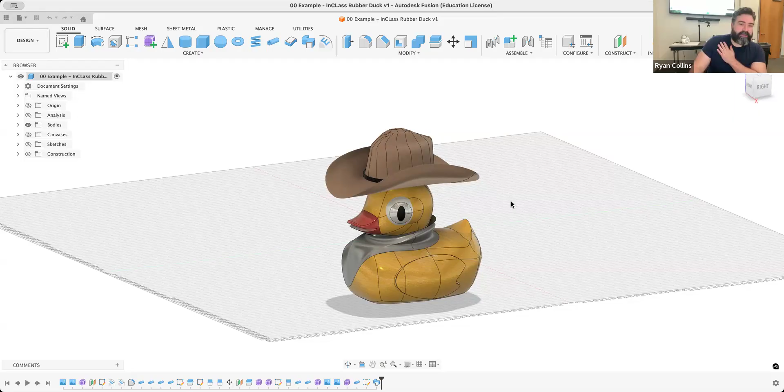But I wanted to show you how you can approach some things that are much more free form, like a hat, a handkerchief, or possibly a couple of people also asked me about a cape. And I wanted to show a couple of different ways you could approach this.

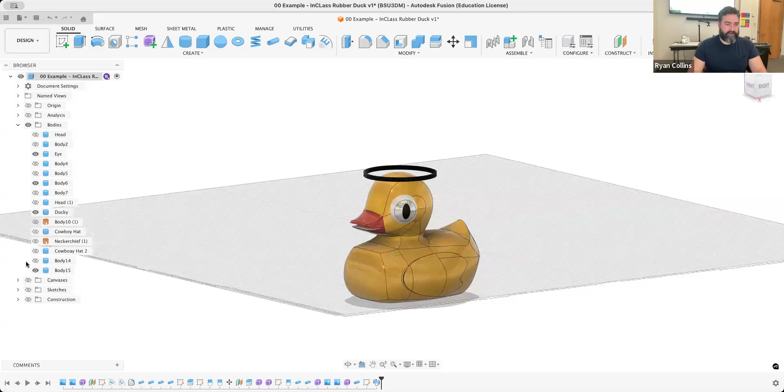So I'm going to stay with the duck here just because it's there. Let me instead hide my little neckerchief and cowboy hat to give you— oh, that's right, I never did join the little band on that. So inevitably I'll start a new component with this, but we'll go from there.

So one of the main things to remember is your accessories do not have to be part of the body, meaning you don't have to combine. Frankly, that would kind of defeat the purpose of it being an accessory, a separate body. If you try to join it, there you go.

Some people are approaching things like they want to put sunglasses on or something like that. Perfectly fine, that would probably even be better done with a sketch extrude situation rather than going through the form workspace. But with things that are much more flowing, obviously you probably need something that is more flowing.

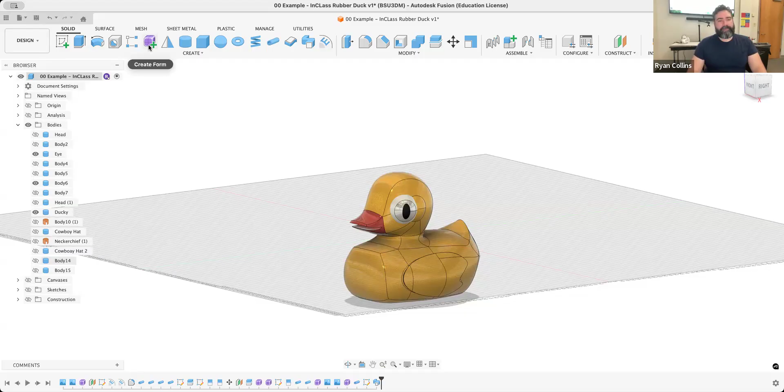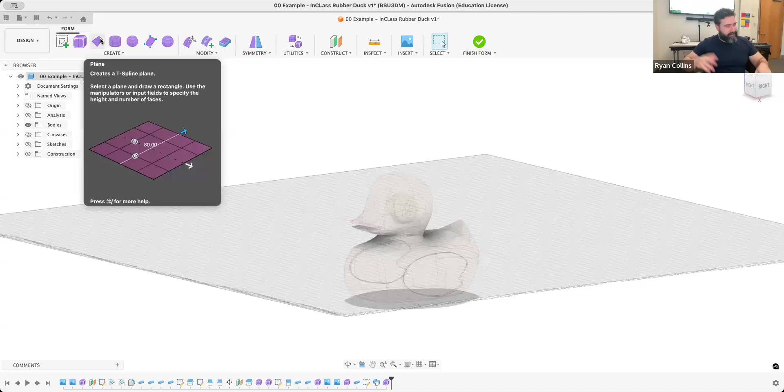So to start with this, I'm going to go to create form, and I want to show first a way to make something that is already going to be an undulating surface, like a cape or towel or something like that. One approach would be to start with a plane and then make it complex enough and move the vertices up, down, around. But if you know that you want something to have a certain profile, well, do exactly that.

So what I'm going to do is—like we've done in multiple other ones—you can create extrudes, sweeps, or revolves, and also lofts into the fusion or into the form workspace. So why not start with that?

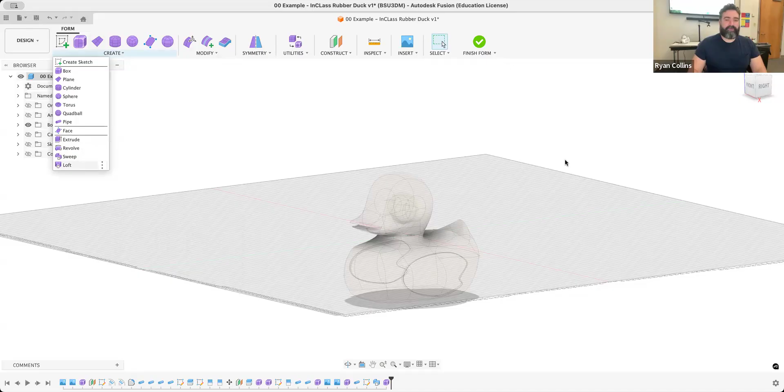So I'm going to start with a construction plane and two sketches. Let me move a couple of construction planes out. Sure, 50, why not. Oh, it's hiding all my construction planes. And let me start another one. Right click, repeat, just because I know I'm going to make something much longer.

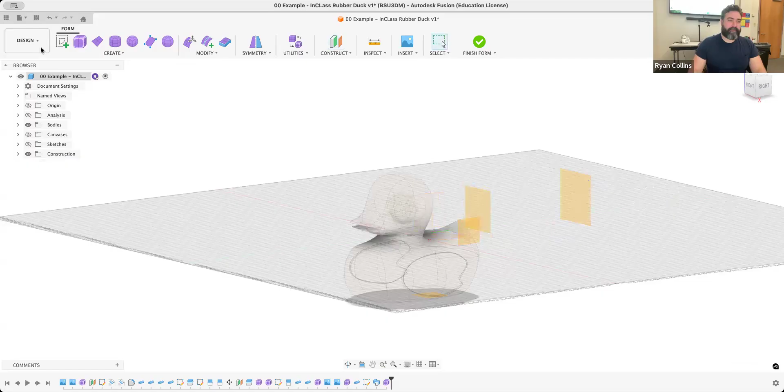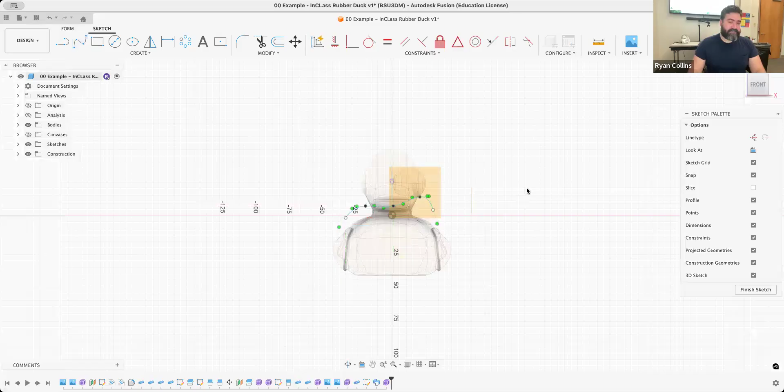Okay, doesn't really matter, so I'm still in the form workspace. You could have drawn these outside of the form workspace, it does not matter. But to start, I'm going to work on the intermediate space, and I'm just going to draw a bit of a fit point spline. So I just want something that's kind of flowy, curvy, starting from there.

The good thing is, as I'm going to build this as a loft, you can always make alterations after the fact. So I'm going to start one sketch—of course, it's hiding my sketches—repeat, I mean repeat the sketch.

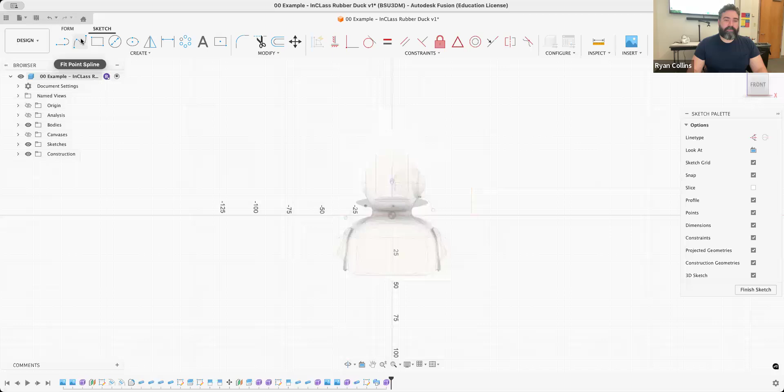Start a new one back there, and let's make this much larger. Super duck it will be. Oops, looks like I accidentally ended my fit point spline there. Did not mean to do that.

Extra flowy, extra big, all that kind of thing. Doesn't even have to end on the same up-down sweep, just gigantic. All right, so I have one sketch profile and another.

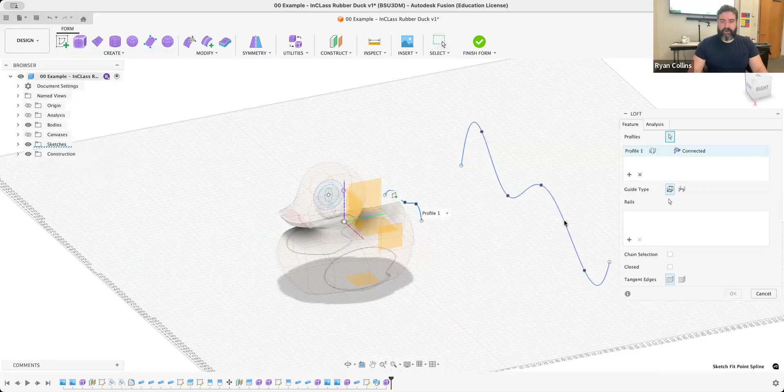Cool, I can go to create, loft, first sketch profile, second one, and it's going to automatically create as a plane now. Rather than before, it would have had to be a completely closed profile, meaning an inside and outside surface.

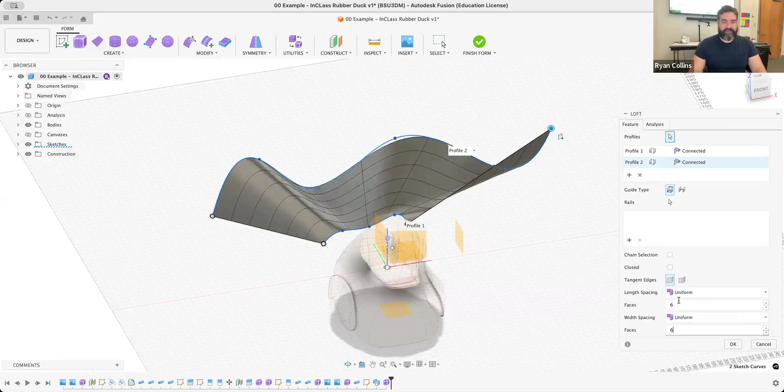This time, now I can create this as a flowing, undulating plane surface, complete with all its own edges, vertices, and whatnot. Now again, you can, of course, still control the number of faces, both length and width. So if you want to simplify this a little bit, do so—but do watch as I simplify the amount.

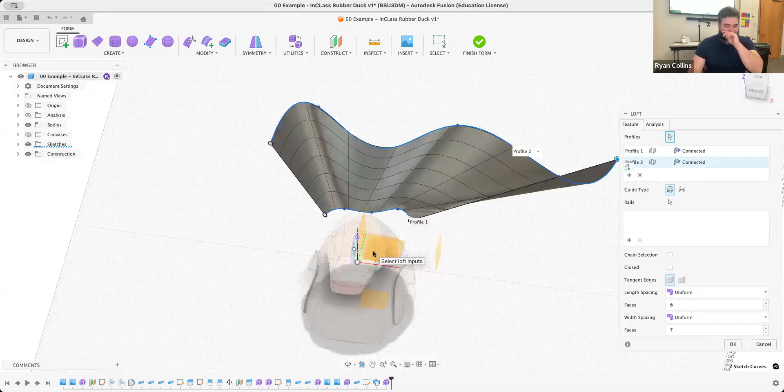If I go too far, it simply does not have enough complexity to follow my profile. That's up to you, you can bump it back up, just see where it gets to get it close enough. So if you want to keep it simple for now, you can leave it more simple and add complexity later. Okay, cool, that'll work for me for now.

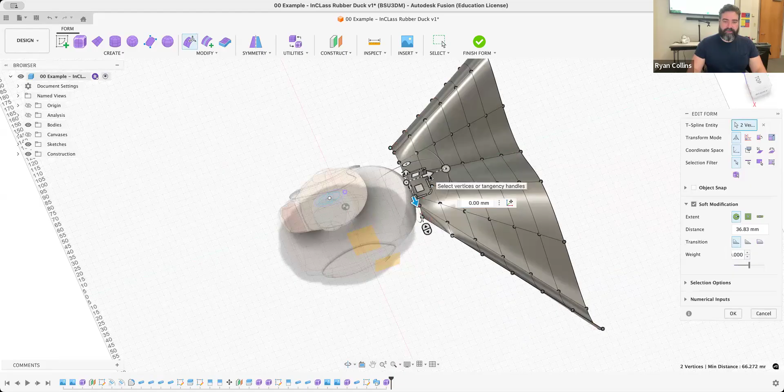From here, now I can go back and play with the edit form just like we've been doing. Let's go by vertex. I want to add the little corners to tie in, so I'm going to select both of those vertices. If I want, I can switch soft modification back on, have a little more control with it, drag those both forward, and now very quickly start to manipulate and become a cape.

So you can see, obviously, I can get really close to what I want to have very quickly. Now one thing about this—oh, should not have done it that way, I think I missed one. Yep, thank you, yep, there it is. There we go. So you don't have to make it right up against right from the get-go.

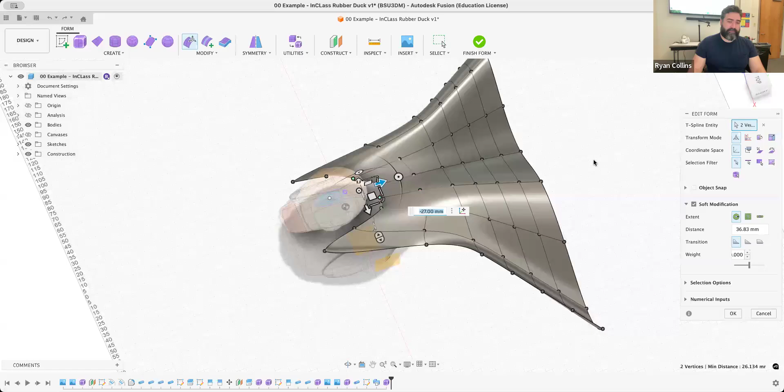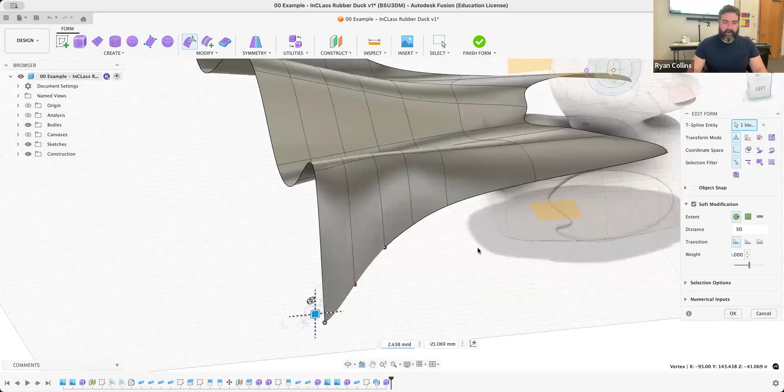And of course, I can continue to add if I want more flow to it, especially since I have soft modification on. Let's select like there, and we can expand the width of the area of effect. So you can see red and black, it's not really showing as well, but anyhow, we can move this up, down, all over the place, just like we would have anything else. So you get the idea.

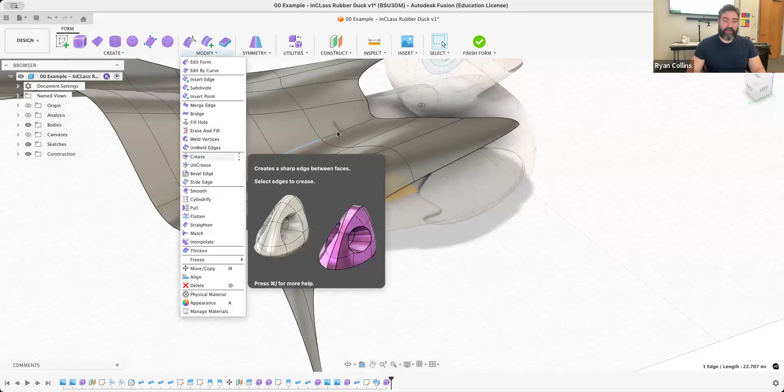You can add complexity, you can even go in if you wanted some areas to be sharper. Well, yeah, let's bring in a crease and add—if I double click, it'll go the entire length, or if I just want partial creases... oops, helps if I actually turn the crease tool back on. You can get partial creases and just play around with it that way. It's up to you, whatever. Easy way to create some kind of like a blanket or cape or blanket cape, whichever you want.

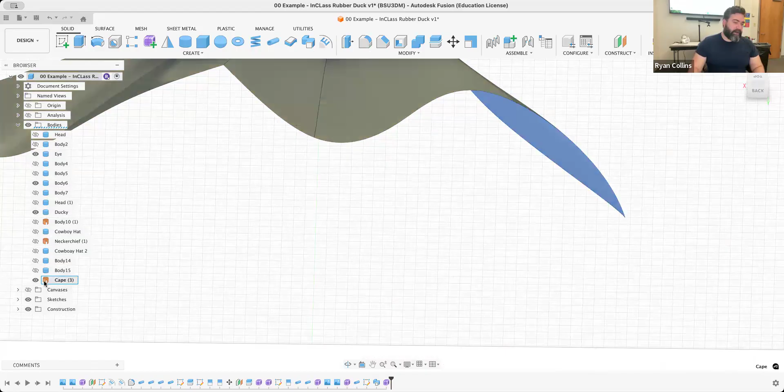But one thing is this: when I go to hit finish form, this is going to read now as a surface. You see this orange shape that's like a partial circle, looks like a piece of paper wrapped around—there's no top, there's no bottom. This is often visualized as one side is gray, and one side is more of like a gold color, yellow gold. That is a single paper thickness. That is currently like when we made our spoons before we added the thickness into it. It is just a piece of paper thick, that's all there is to it. There's no dimension, so it does not read as a solid object.

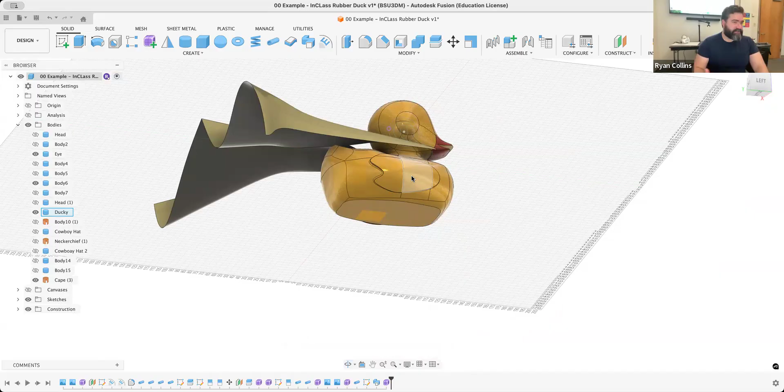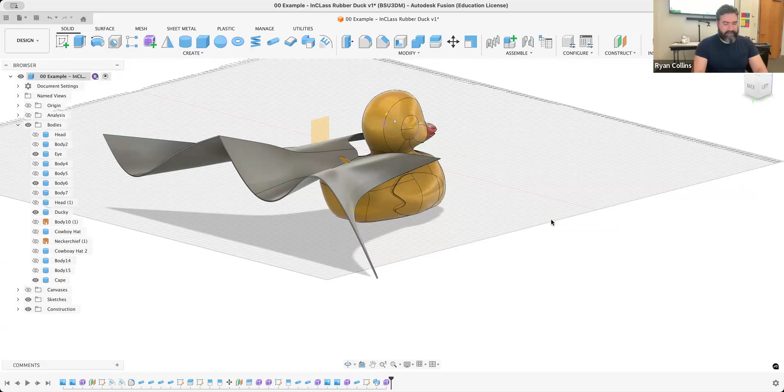So if you were to say, actually make this to be 3D printed, this isn't a thing yet, this is just a surface. So what that means is I just need to go back in, edit feature like we did before, thicken, and add whatever—1 millimeter, sure. Now, when I go to finish form, you'll see that now reads as a solid object, as a body. That's the only difference. So just make that slight alteration, you make it thicker or thinner, however you like, more power to you. So save, if I could spell—and apparently I have the caps lock on.

Okay, cool. Okay, well, what about something more contained like a hat? Oh, apparently I made a couple of different versions, I forgot about that.

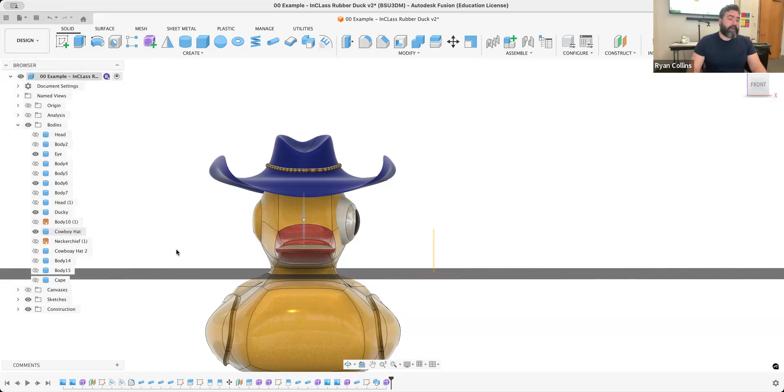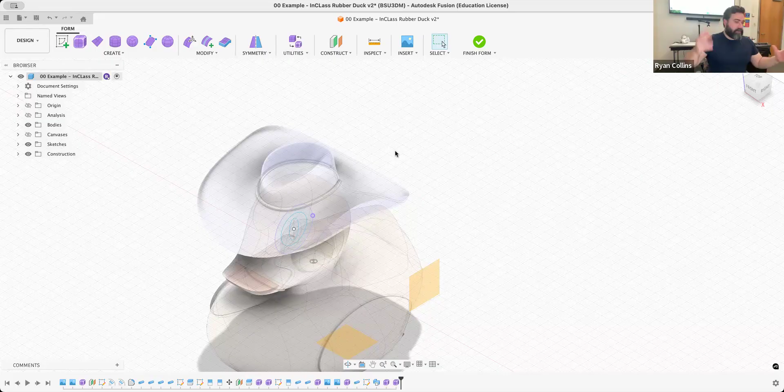Well, there's no immediate plane tool—there's not a round plane tool, and that is actually one thing I really wish they would add into Fusion. So let's go back into the form tool. To create this, like any other object, you really want to try to simplify the shape in your head of what is the closest approximate starting point that I can use to get to where I want to be. So like with the cape, yeah, it's going to be a flat sheet, well then some kind of a plane, but I wanted it to move, so it made more sense to create two fit point splines and a loft between, and then create the plane that way. With this, I kind of need like a flat thing, a round flat thing that I could push up. Well, that's not an option, so let's go the opposite way—something that's already round that's up that I can stretch out, which would be a cylinder in this case. So let me hide this.

Hello. All right, won't let me hide the pre-existing cowboy hat. Fine.

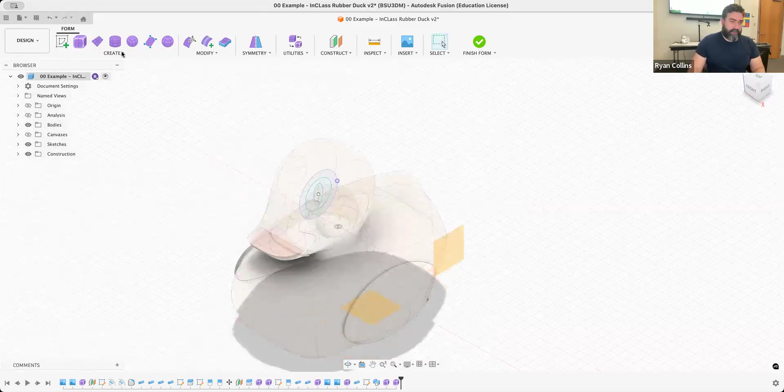Super, okay. So the starting point would simply be, let's use a cylinder then. Remember that a cylinder in the form workspace, using a center point right there, creates an open shape, meaning it's just the outside. So as I create a dimension, it's just a tube.

Now you can make this as complex or simplified as you want. Again, make it simple, a little bit like that. Might as well turn on symmetry.

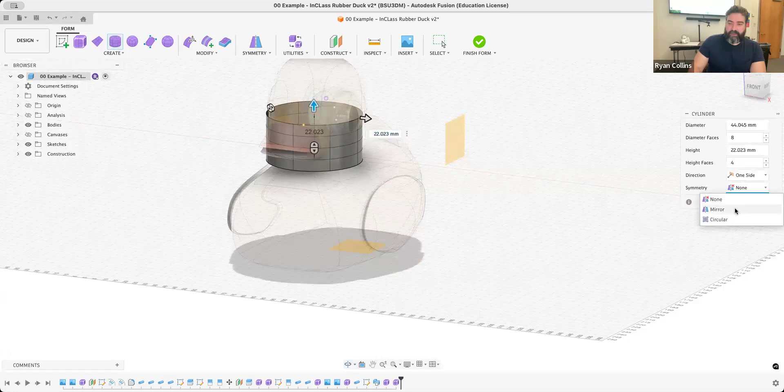Let's do mirror. And because it's a cylinder, you got to be careful. Make sure that you have enough sides to where you have an actual defined left and right, if that's what you're wanting. So in this case, I do want that.

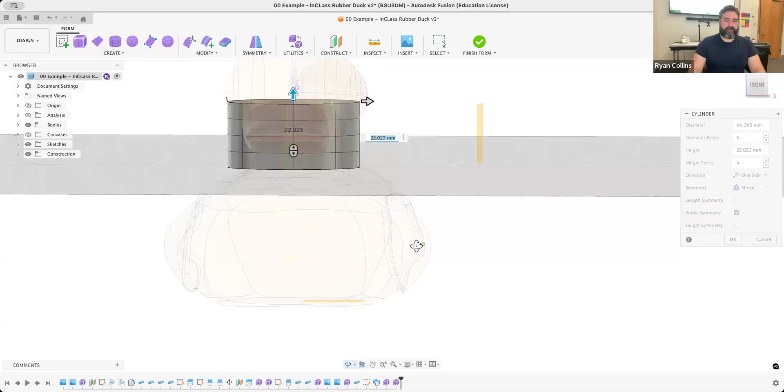Is it height symmetry? Nope, it should be width. There we go. And good, green is going right across, straight down the center. Excellent. If I want to simplify this, might as well.

Okay, but I do need to close this up, obviously. So I'm going to start by going to modify and fill hole. Select the top, double click. Let's go through a couple of options.

Can't hide all the bodies, but I can at least hide the sketches, clear it up a little bit. Let's go through some of the options that will make the best choice here.

So the reduce star doesn't look great. Fill star, still kind of problematic. Let's try collapse. I think I can work with that. I at least have a clear left and right symmetry across.

If I want to keep the creases, that'll keep it sharp. I don't know, maybe you're making more like a stovepipe top hat style. In this case, I'm going to keep with the cowboy hat because that's what I'm trying to show. So not keep creases, but I do recommend if you are using the collapse option,

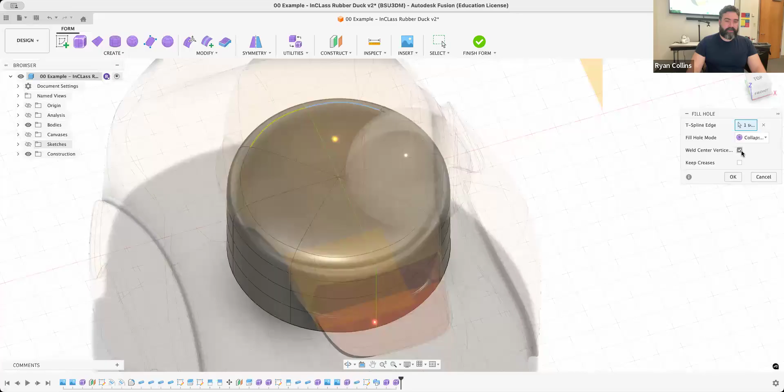pre-check the weld center vertices. You can see my model kind of tweak a little bit, as in it changes ever so slightly. But when I select that, that means the center automatically joins completely. For some reason, I'm not sure why.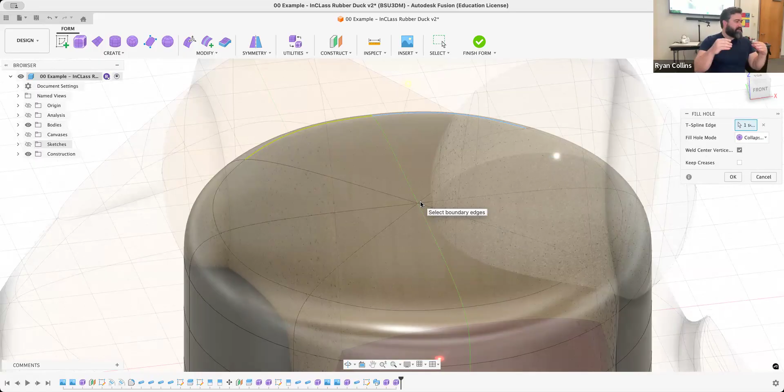Often enough, if you close a cylinder like this, it won't create one single vertex that they all join. It seems to create multiple vertices all occupying the exact same spot. And when you go to finish form, it creates some really weird errors. Don't know why it does, but seems to fix - if you check the weld center vertices box, usually fixes it.

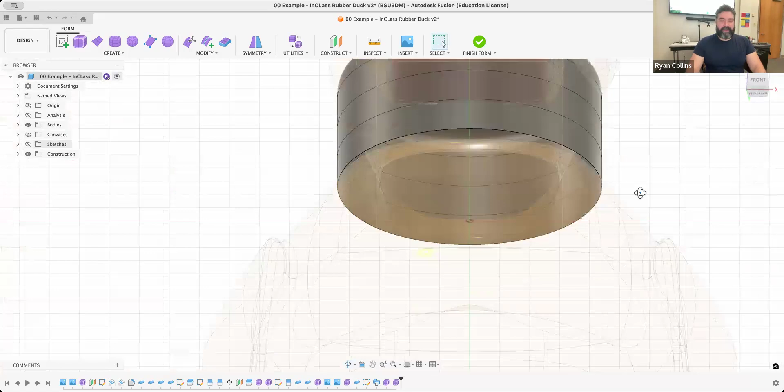Okay, that gets us real close. Granted, it's more like a fez right now, but that's all right. But it is still a surface. You can see inside, there's no bottom to it.

Great, so now it's just a matter of playing around with it. So we'll go back to edit form. We'll go by vertices in this case. I'm going to select here, and I'm just going to shrink this down a little bit.

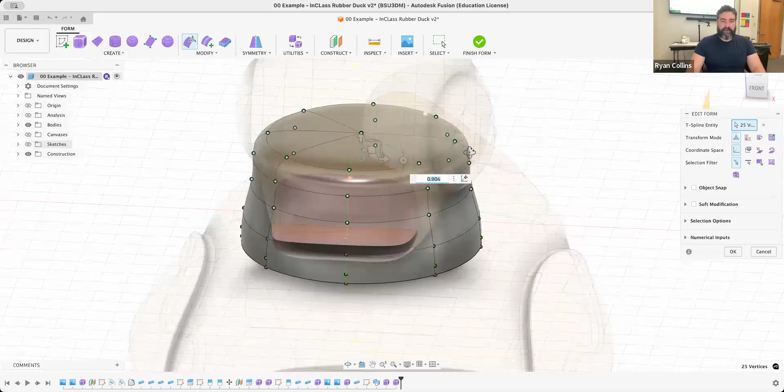Let's see, let's do a uniform shrink for this one. That might be a terrible option. I don't know yet. Maybe I'll shrink it side to side, so it's immediately going to start getting a bit more hat-like. Sure, but what do we do at the bottom?

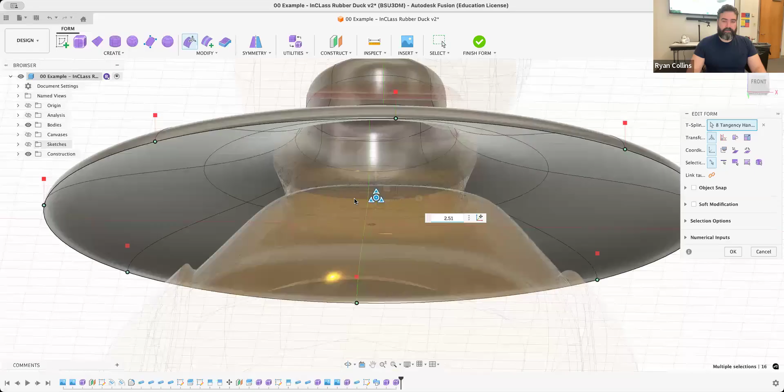That's actually the easier one because we're working with a cylinder. Or apparently if you want to make a UFO hat, I don't know. I'm going to select all of these and I'm going to use the uniform three-dimensional scale, the little center one, and scale outward.

Ooh, more like a sombrero, I mean, cool, whatever, you do you. That's a hell of a brim on that, but maybe we shrink that just a wee bit. Yeah, exactly right, have a little duck and anyhow. So that'll immediately flatten it out.

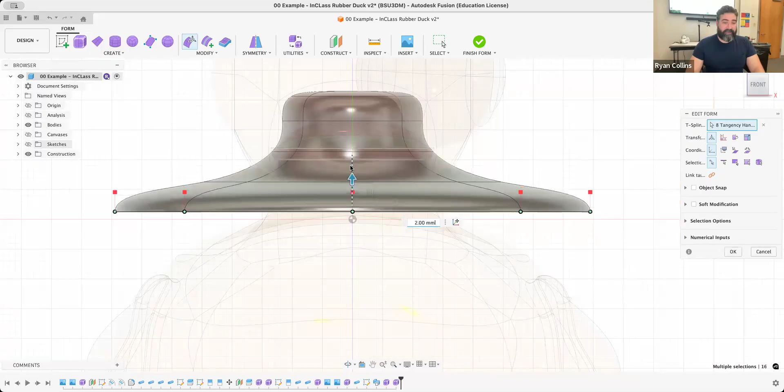And then from there, you can just start, like we've done with everything else, tweaking it, get it close to where you want it to be. Now, one thing is I do not have soft modification on, but it's dragging a lot, and I want to try to flatten this hat.

Well, a simple trick to that would then be, let me finish here, and let's go put a crease somewhere, probably here at the bottom. All right, sharp crease there at the bottom of the hat, or the bottom of the top there. Go back to edit form. Let's start to tweak this a bit more.

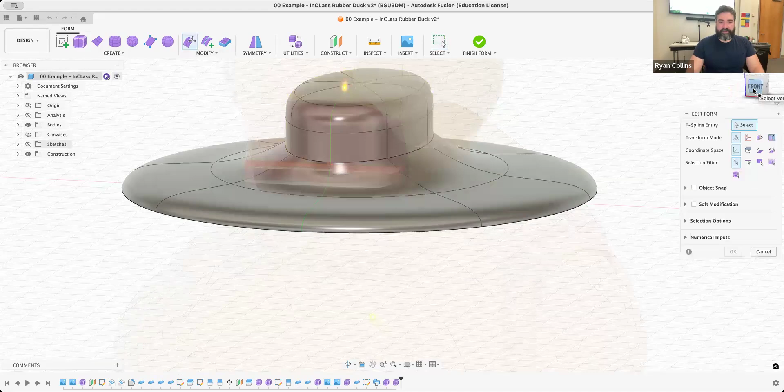Now, since I have that crease, I can work with this a fair bit more. Flatten it out, and now you can see where I'm going with this. I'm just going to keep it the giant hat because now I'm entertained by that. Now, the trick here is going to be, I want to try to create that curl upward on the sides of the brim. How do you do that?

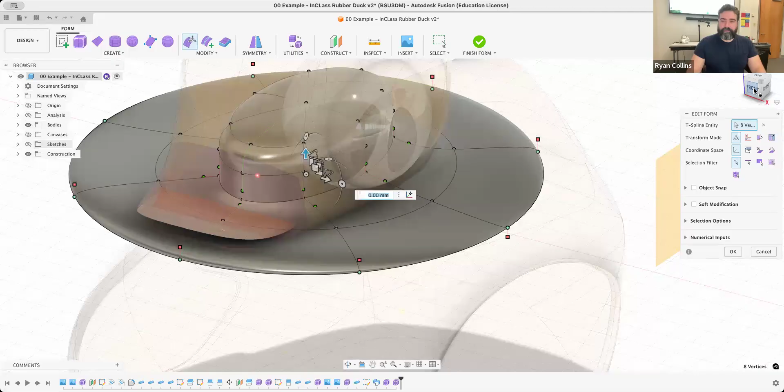Well, obviously, we're going to have to start selecting only some of the vertices now. So from here, start tweaking this upward. But if I switch to by edge instead of by vertex, I grab these two edges, and now I can actually rotate, and I get a lot more control that way. So swapping between how you select things by vertex controls everything pretty evenly.

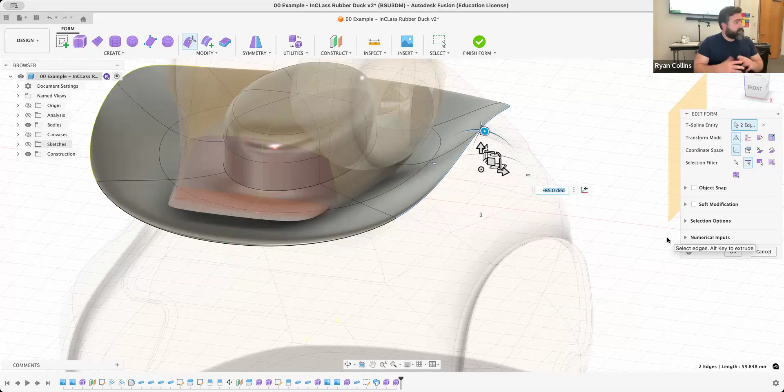You also get a really good effect by using the soft modification. However, as soon as you need to add any kind of curl, change it up and use by edge or by face, because rotating vertices, especially individuals, does absolutely nothing. Now you can select groups of them and you'll get kind of the same effect, but I prefer, personally—this is just how I've found I like working—switch over to select by edge, and I'll very quickly start to get much more of a curl.

Now remember, don't go too far. You're definitely going to run into errors, but this is where you just start playing around with it. Same thing here. That rotation worked well, but...

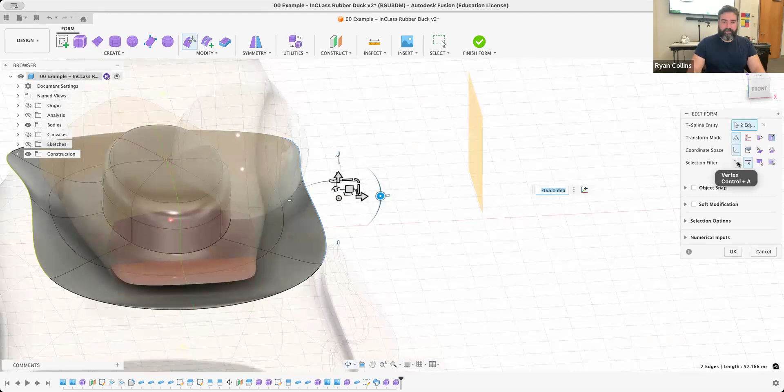Let's see, let's change that one to vertex. Let's see if I can get that to also move around. All right, starting to get really pretty okay with that. I'm really not too put off by that.

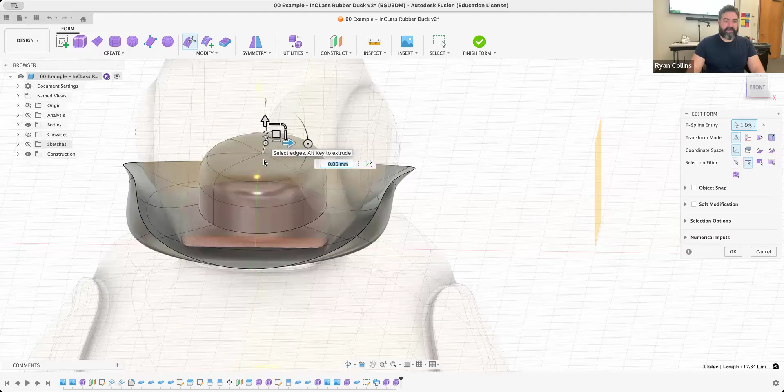Same deal if I wanted to work in the center here. Let's switch by edge. I'm going to select those two in the center. Let's drag that downward. Now, obviously, that's not working as well. I do get kind of a little push in, but I definitely want to come back.

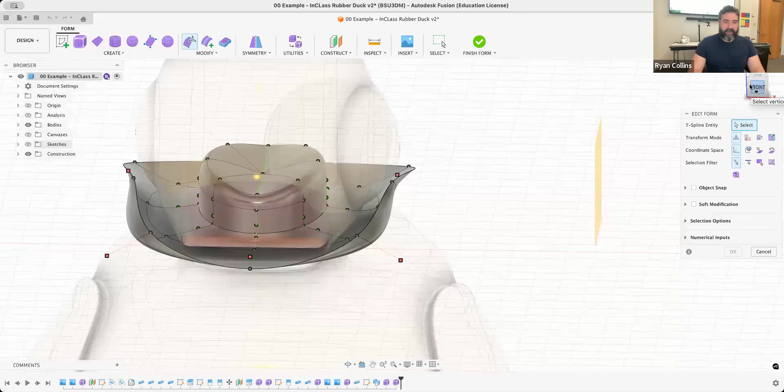Let's add a crease to that. As soon as I sharpen up that edge—oops, I uncreased it just now. That is not the effect I wanted. Now, when I come back in, swap back over to edit form. And yeah, obviously by now you're seeing that it's a lot of back and forth.

Now I can work with the vertices, drag these inward, and I can very quickly start to get the overall shape that I want. You want more detail? Okay, it looks more like a molar at the top at this point. So I don't know, maybe it's got a tooth. It's a little dentist—it's a cowboy dentist. I don't know, you do you.

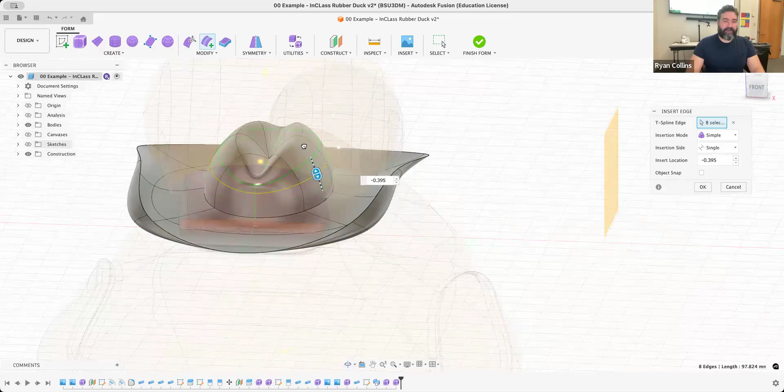I'm just going to flail here. Obviously you start working in, add some more complexity, insert an edge there. Now I have a little bit more to work with.

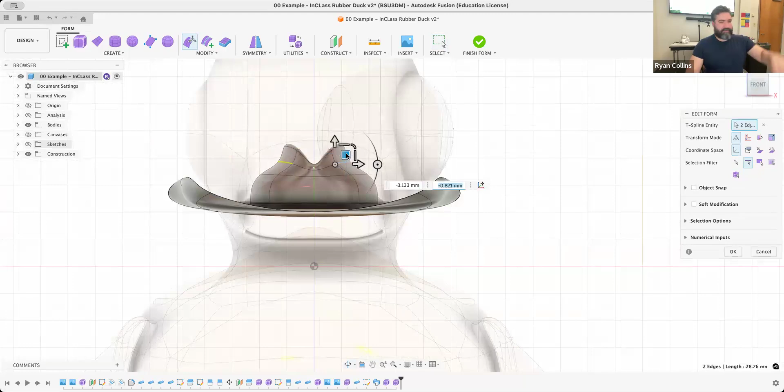All right, we're back to edit form again. Maybe select a couple of edge lines that work along the side. And now if I drag these inward, I start to get that little hold in a little bit. Oh yeah, so that's somewhat hat-like. Obviously, more tweaking, you get there.

Now, one thing, if y'all haven't seen this yet, let me see if it shows up. All right, it's not showing up, so it doesn't matter, I'm going to ignore that. There has been a built-in form check there. So obviously, before you go to edit form or finish form, if you want, you can always go straight to utilities and just check for errors. But so far, there haven't been. I don't see anything popping up.

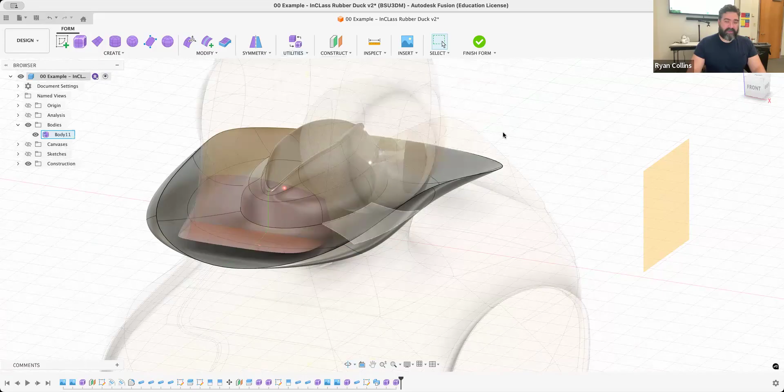So let's try finish form. Okay, well, I didn't mean to make it around his neck, so it's more like a scratch collar for the duck, but whatever—I don't know what all I have in here. There we go. Oh God, that is horrifying.

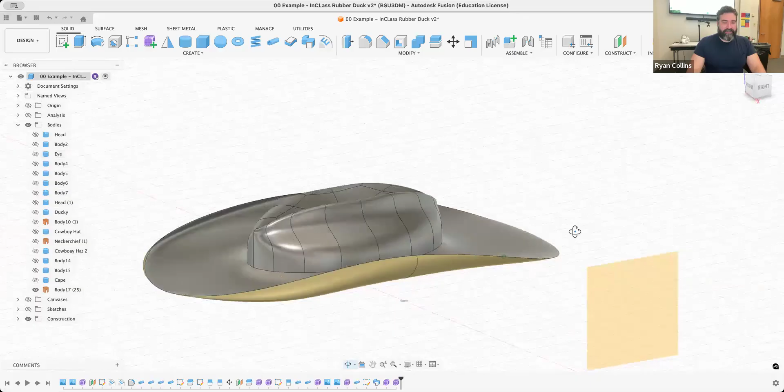Well, cool. Man-made nightmares. I have a floating body here that I've created as a surface. That is a long hat - probably want to shrink that a wee bit. Since I've created this as a surface, I definitely need to go back in, edit, and add some thickness to it.

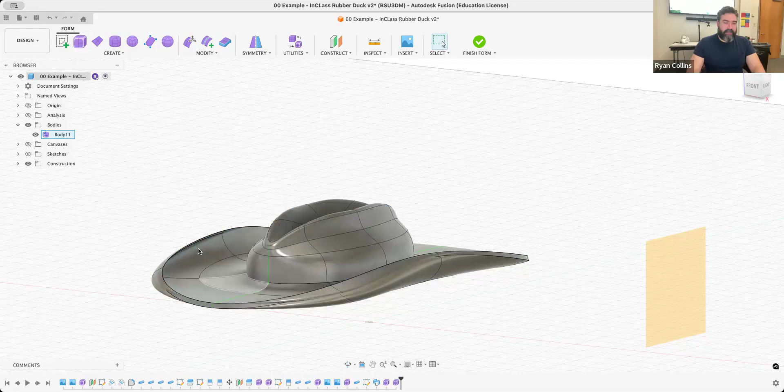In this case, I'm going to switch over to a soft sharpness or a soft thicken. You might get a little distortion, but if you start to get some odd internals here, like in the brim of the hat, I'm getting some really weird stuff. Let's check - I may have just created a completely... yep, see, now I have errors.

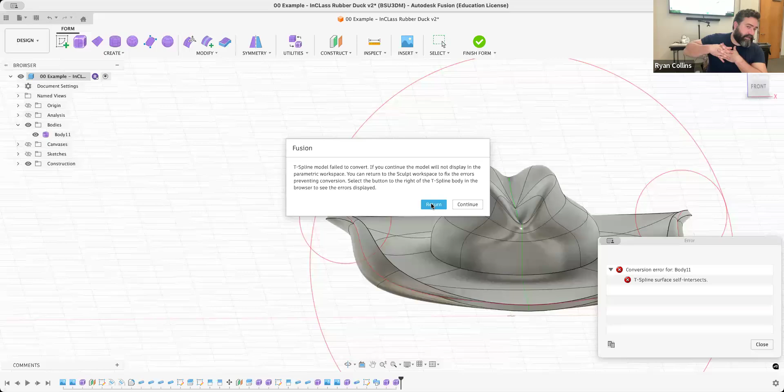So it might have been a better option to have done the brim after I added thickness, but we're here where we are now. So let's just check if a repair body works. No, I don't think so. All right, so then we have to switch to box mode to see a little bit more clearly.

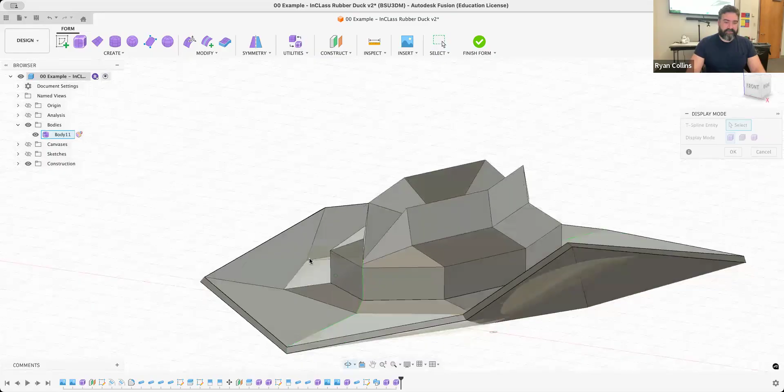Yep, that's kind of what I expected. And the issue is probably down in here. Top looks okay, even though it strangely looks a little funky. So let's just change by vertex. Looks like it's just that one down in there. Let's just drag that up and outward a little bit.

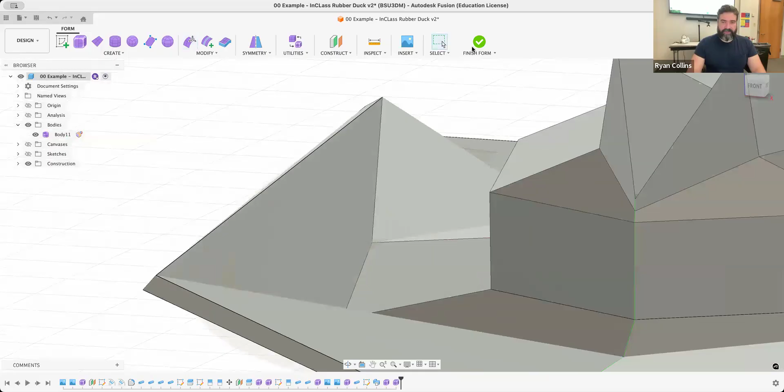Let's see what that does. Looks like I might still have some errors, but let's try it. Still some errors. Oh yeah, sure, of course it's on the inside, or just these large circles. This entire area is a problem - self intersection, yeah, probably the same.

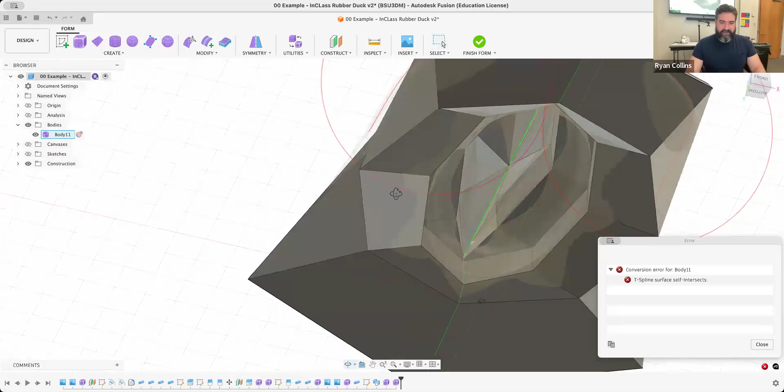So again, you might have to go do some more tweaking. Looks like I got some issues under here. I can always just come around and start playing with this. But ultimately, like we've worked with before, gonna have to just kind of tweak some of these issues, drag them outward, and just kind of work the problem.

It might have actually been better to have thickened it with a little more dimension. Maybe that would have helped. Who's to say I can't? That's always the problem with edit form - can't really go back and forth.

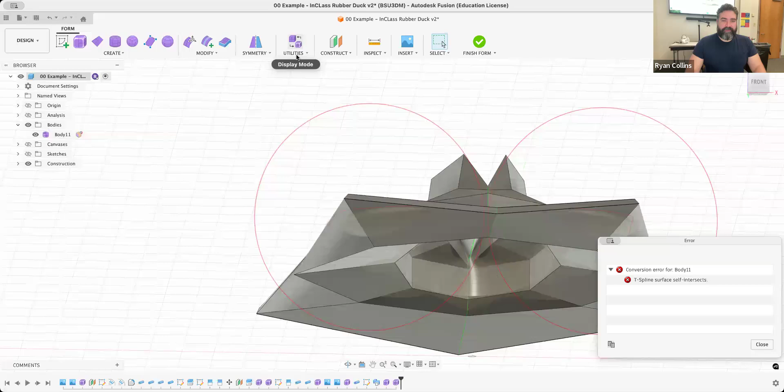All right, now that I've moved things around, let's just give a quick try to repair body, see if it works for me. Hey, it did this time. Okay, so we're able to move stuff around a little bit. Looks like I might even still have some error. I probably am - I don't know what happened there. It might be an odd artifact of how it's being visualized, or it's still an existing error. Don't know what.

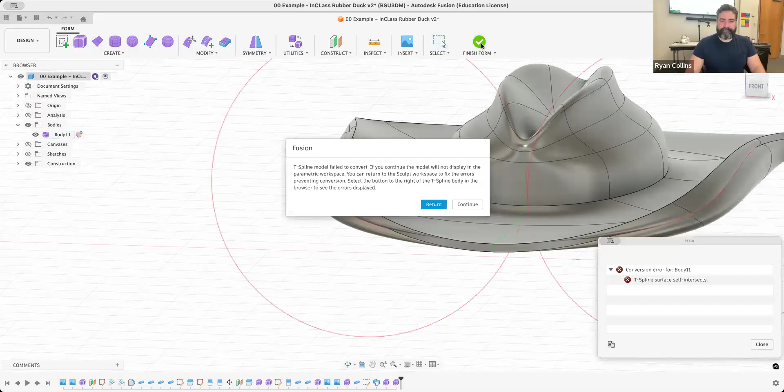Yeah, okay, cool, just a full untangle situation. Fine, let me try one more thing and then we'll move on because I don't want to waste too much time with this. Looks like I have some odd issues with the edges, so I think I'm just going to select the entire edge here. Let's drag that up and around.

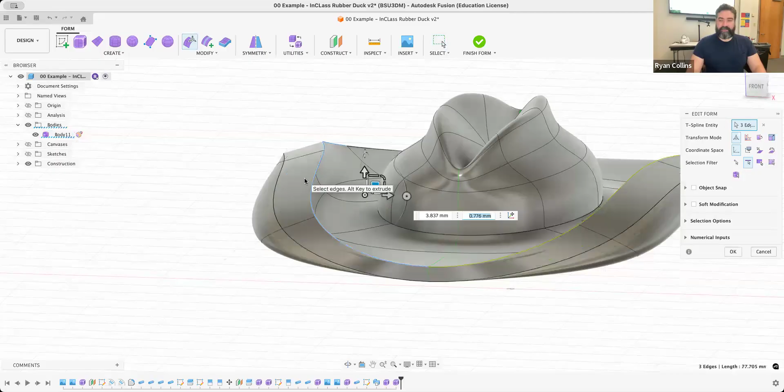There we go, that kind of untangled it. That is a not great looking hat, but that does look like it untangled things. So let me try that again. Finish form. Poop. Well, it's gonna be one of those kind of days. So anyway, we'll just continue.

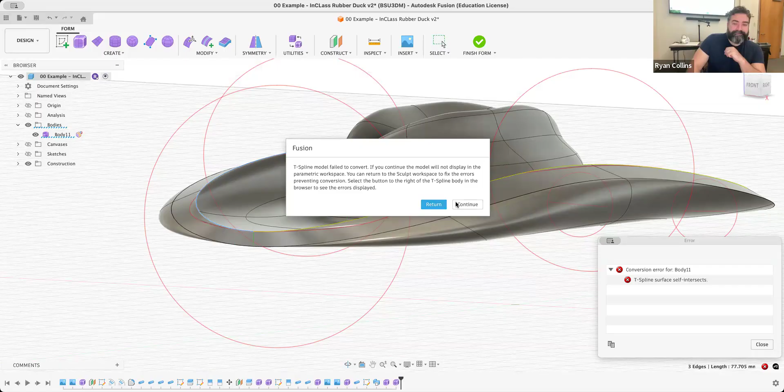I'll ignore it for now and I'll have to work at it later. But that's pretty much how I would go about making some of these parts, aside from the errors. Keep working at it, that sort of thing, and you'll eventually get what you want. Why is it now not showing? Oh, it's up there. This was just done with, it looks like, essentially the same thing, but what I did is I just had a bit more of a clear space to work.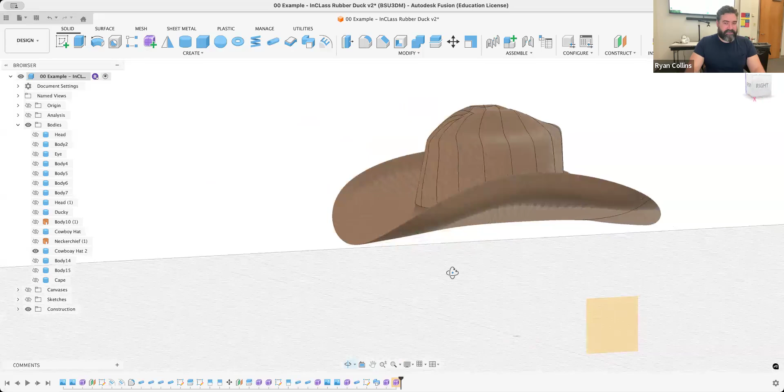This one, I think ultimately I just ruined the one I was just working on. I just tried to curl the sides in a bit too much, and when it added thickness, it just created a self intersection. So in all reality, probably can just go Control Z or Command Z a few times, get back to where I was, and unfold that. But sometimes it ends up that you've kind of tangled things a bit too much, and it might be easier to just start over since I didn't exactly spend that much time on that.

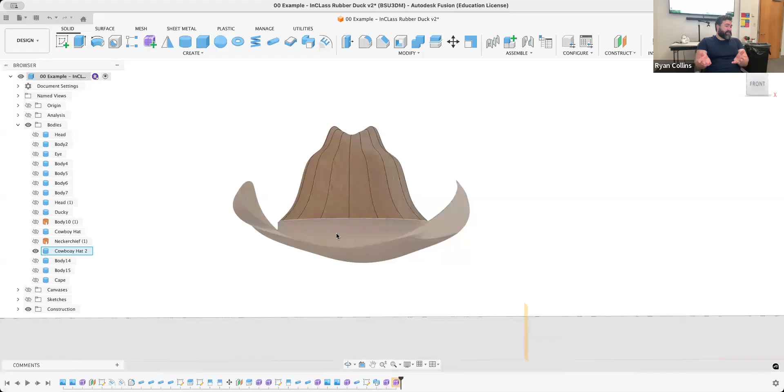But just tweaking a few things with your form workspace, you can pretty quickly create some actually pretty involved accessories - so like the hat, the cape, whatever, super duck, and away you go. So I'll fix that eventually, but for now, super cowboy duck it is.

Hopefully that gives you some pointers on how you can approach at least more cloth-like materials or objects. We'll go from there, so good luck with it. Hopefully have fun, or at least you're able to fix problems more quickly than I am.